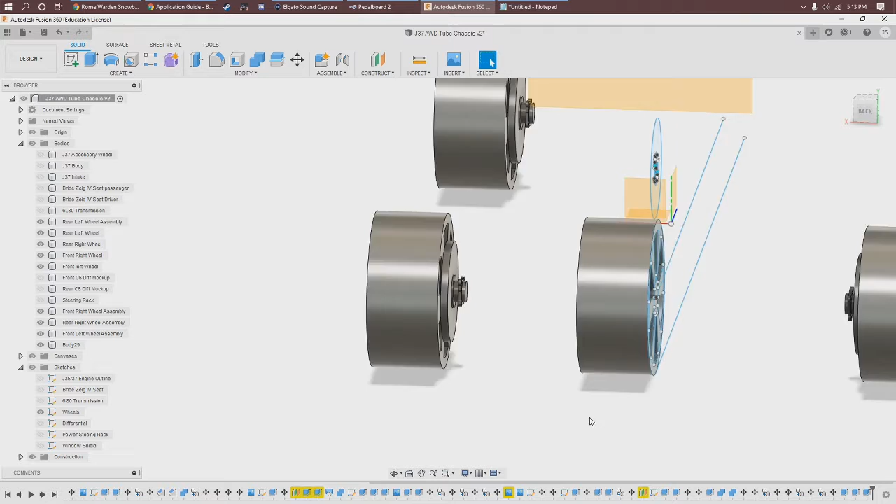A little bit more about this car: I am designing as I go and looking for constructive feedback, as a way to make sure I am making the best choices. I'm interested in answering questions about the choices I've made so far. Not all parts have been selected, though my previous experience defined many of them. If you know of better parts, please let me know in the comments below.

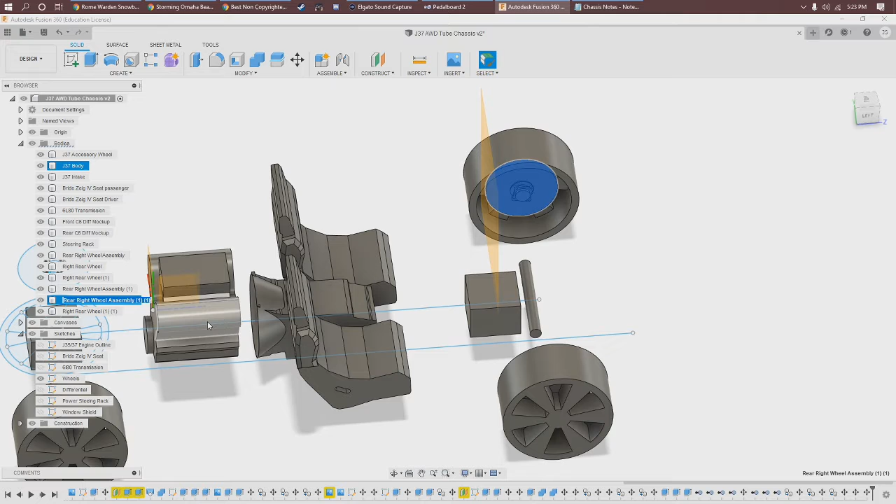So it's kind of based off of a WRX, but this is a rear mid-engine setup. Mid-engine means the motor is behind the front axle or inside of the back axle. This one's inside, and it's a J37 engine out of a Honda Odyssey.

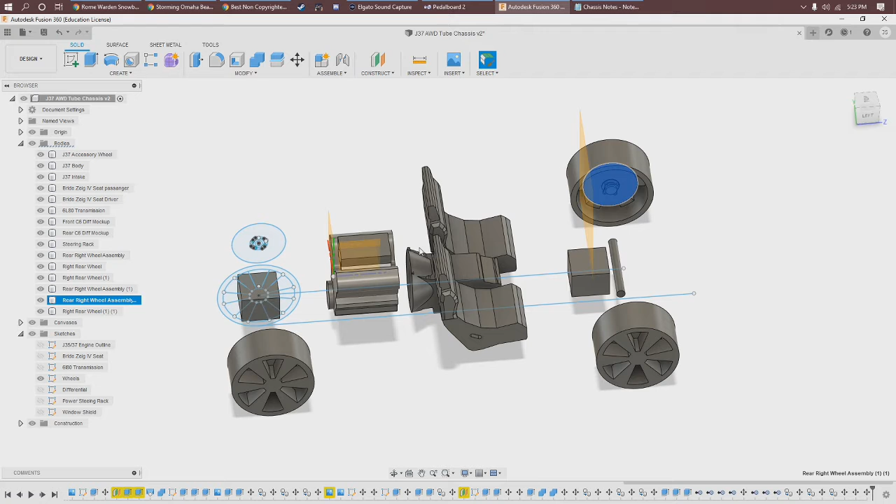It's paired with a Chevy Corvette transmission, and I still have to build the adapter, but I need more information, so these are just really rough mock-ups.

It's a Chevy C6 diff on the front and back, and there's going to be a transfer case here, which I still need to figure out, that will redirect power back underneath through a drive shaft. Sometimes they call them torque tubes, but that's more on the engine side. So, drive shaft, and then a drive shaft back here, and you get all-wheel drive out of that.

Still trying to figure all this out. I don't really have a good setup for the transfer case right now, and I need to relocate everything now that I have my final dimensions.

So what I'm doing right now is getting my offsets on my wheels, so I can start getting my geometry for my steering. Basically, as the wheel moves up and down, you want to make sure the wheel either comes into camber or not at all. I think I'm going to build in a little bit of camber as the car lowers, like from braking or going over a bump. But I also want to make sure I'm not getting any toe, which is where the front of the wheel moves in and out compared to the back.

So I'm going to be going through all of that today, making my design points, and then possibly drawing out and modeling some stuff. But right now, just getting those points.

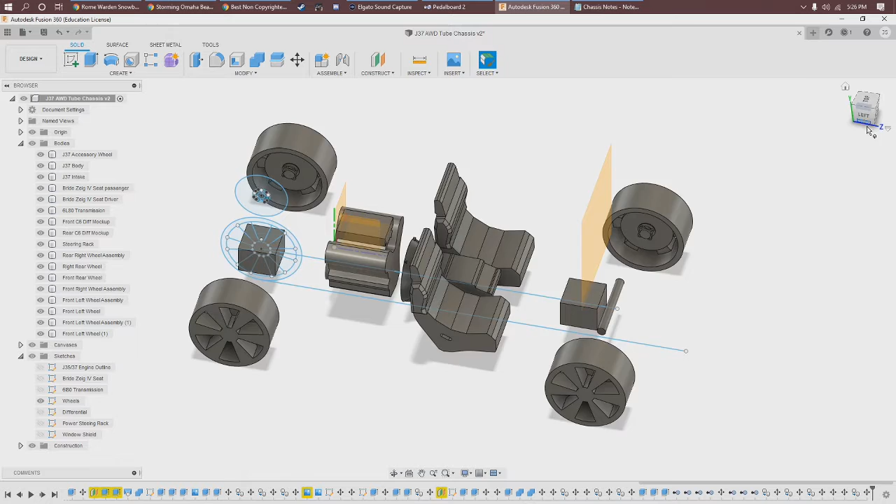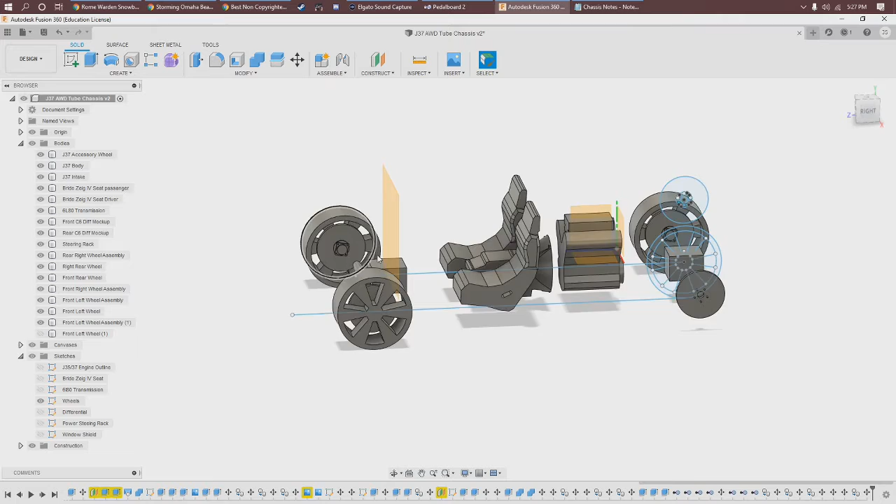These are pretty rough mock-ups, they don't look quite right yet, but this is a Brembo brake kit, an 11-inch brake, modeled correctly on its thickness. And then I just did a really rough model of the bolt-in wheel hub design, which is really ideal.

It allows an axle to come through, so if I do go for this all-wheel drive setup, I'll already have the axle properly spaced. I've got a guy down in Florida who will make axles for me, since they'll index differently to this diff than they will to the wheel, and they'll probably have to be quite long.

It also allows me to build a really simple wheel hub, like this wheel hub assembly here. Once I get that, I'll have the offsets, so you'll see some of that coming together there.

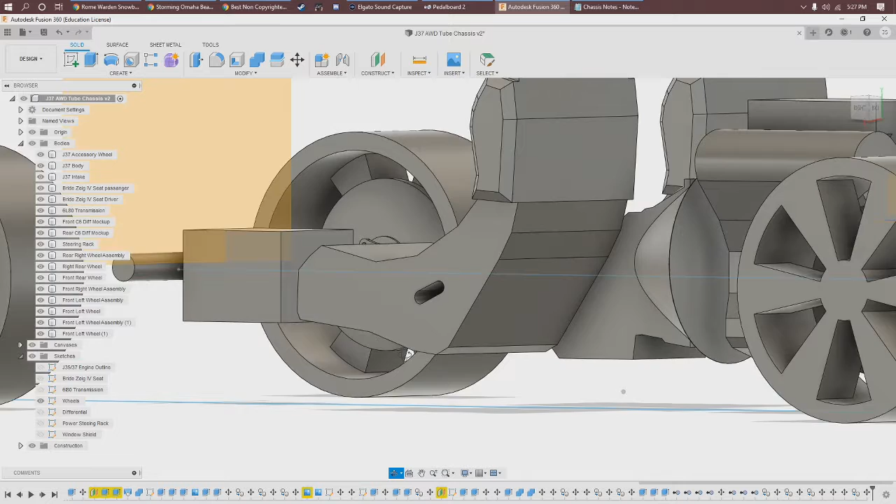This is a 0 offset wheel right now, which is 12 inches thick, though it might go to 11. Then I'll have to redo the offset so I can keep the same angle.

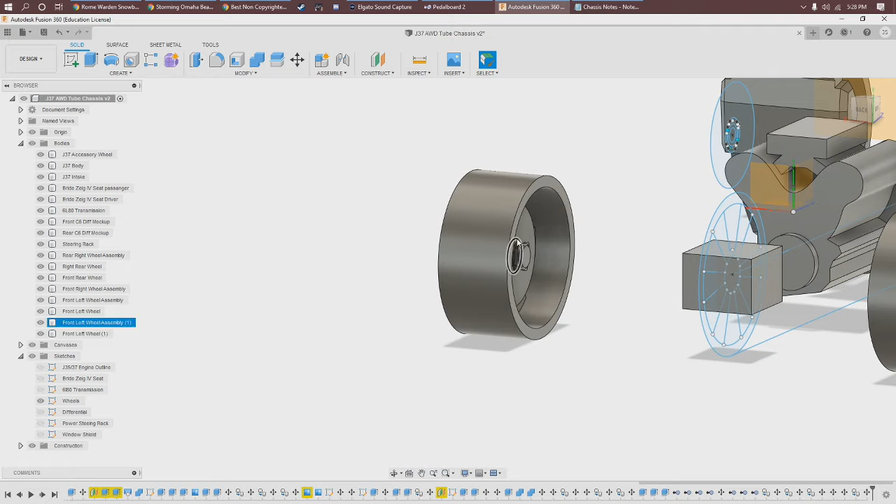Anyway, so that'll connect, and there's a line that more or less has to go from the center spot on the back of the wheel to where all the connection points are. An angle forms where the connection points to the hub are, and you want that line to pass through the wheel right at the center point—that's what you call the 0 scrub radius.

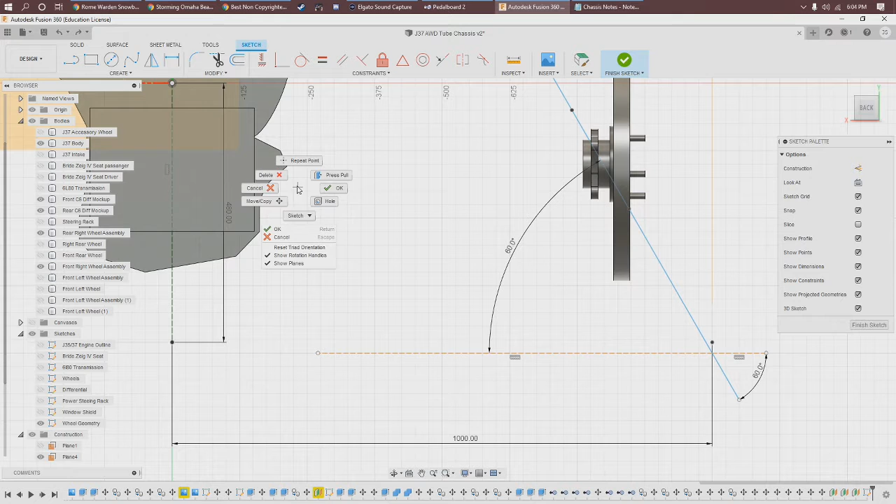I decided to go this way because I knew there was going to be a lot more here than I actually knew about. So I figured it'd be best with this first iteration, given the modular design of this car, to start with something known and then work from there.

So what we're looking at right now is building out the scrub radius. I'm looking at the center line of the wheel, and trying to design a line from the upper and lower ball joints to get that line to cross over with the scrub radius. I'm not exactly sure what camber I'll want on this wheel, so I'm designing that crossover line slightly to the inside of the center wheel.

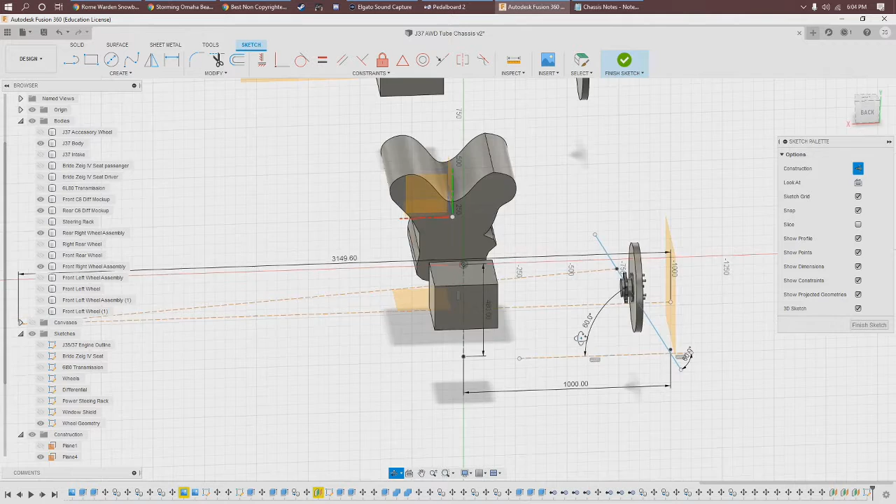I've been told that some scrub radius is good for feedback. I'm not sure if that feedback needs to be in all four wheels or just the front ones—it seems like it could just be the front. But I do know that a negative scrub radius drastically reduces feedback in the wheel. So I'm going to go with a slight amount of in scrub radius, and with the camber that should make it basically zero. If I need slightly more scrub radius later, I can reiterate on that hub and use the same linkage.

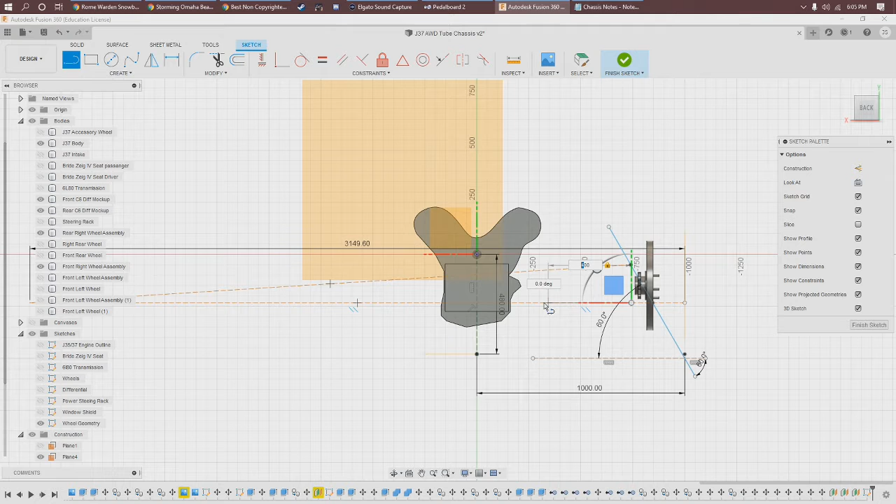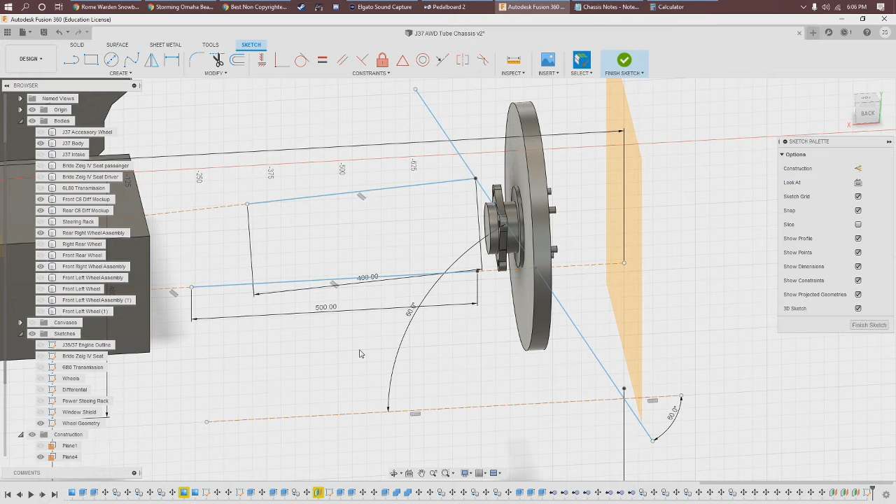Okay, so those are going to be our rod ends, basically. Now we're going to make up the linkage here.